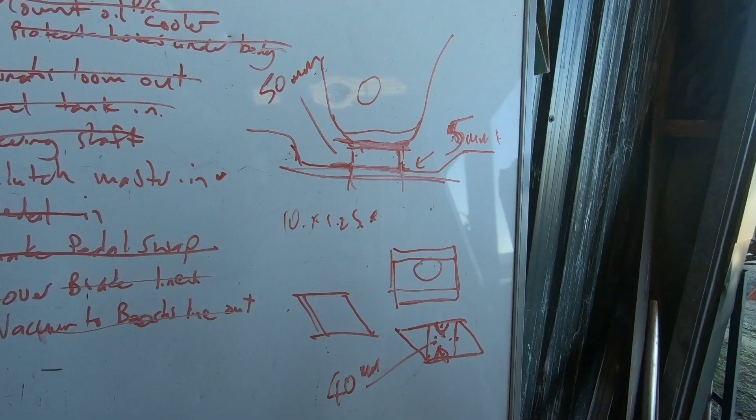A couple of days ago I drew some hieroglyphics on the whiteboard for Mike to follow, and he's done that and produced this little bracket. Of course it's not finished, it'll be strengthened up, but he's done an awesome job of following my instructions.

I got in yesterday and had a bit of a look over it, and we did some workouts with the radiator, trying to fit all that up, and he'd made some brackets for that.

I thought we could do with a few more mils of clearance for the fan, so I moved the engine back, started setting about giving the firewall a light tickle.

I set about moving that motor back a little bit. I shortened up the bolt that came through the firewall by a few more millimeters, and gave the firewall a little bit of a rub, very slight on the driver's side, and that moved the motor back maybe 3, maybe 4 millimeters. I know it doesn't sound like lots, but it's going to make a difference when we put that fan in.

Today Mike is going to cut that bracket to bits a little bit, and we're going to move everything, reroute it, and tack it in another spot. That bracket will be strengthened up on the bench later, but it's much easier to just mock it up for now. It's strong enough to hold the gearbox in place.

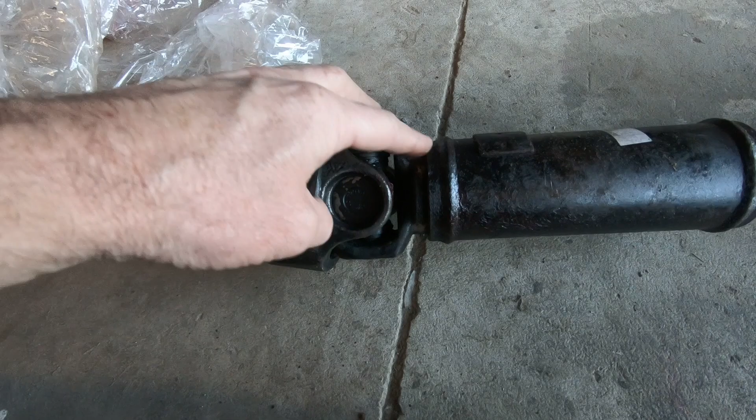So it was the last guy trying to fit it - he measured up drive shafts before he even had the motor properly fitted in place. Now that does give me a bit of a problem. The reason is we require paperwork to prove the drive shaft has been completed by a competent person, suitably qualified in the welding, balancing and manufacture of drive shafts. It's one of the things we have to outsource. But this one has already been done, and I don't have any paperwork. There's a bit of a problem.

In this situation, I've got two options. One, throw the shaft away and start again. Or two, hopefully this is going to work, is I will create the paperwork by taking this drive shaft to the drive shaft technician, who will check it, balance it, and say it's all good. Fingers crossed that he's willing to do that. If not, back to plan one, throw it away and start again, or we might be able to find a diesel one the right length.

For the back drive shaft, we put that in place, and it is looking really close. I'm thinking this is a factory diesel one. On the last one we did, we ended up moving the slip joint from here to there and throwing that double cardan away - it was having problems spinning that hanger bearing.

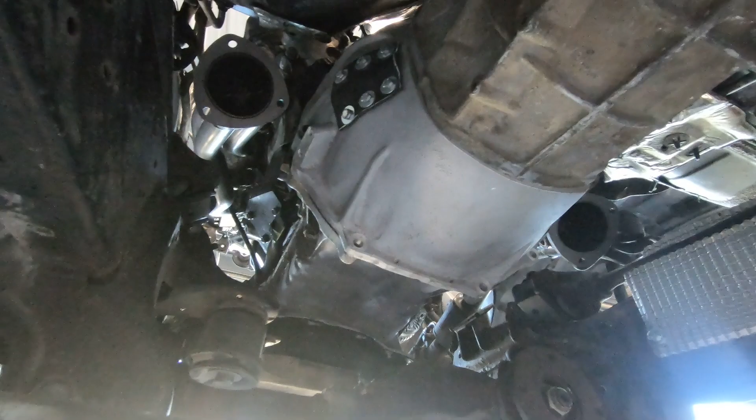What have we got to do in here, Mike? Just connect it and make it run, eh? Drive it out. Plug it in. Problem is I haven't done that. Haven't even wired it. Once it's mounted, we'll mount that dampener. And we're attempting not to put it underneath in this one. We're trying to keep it on top, like I did with the last one.

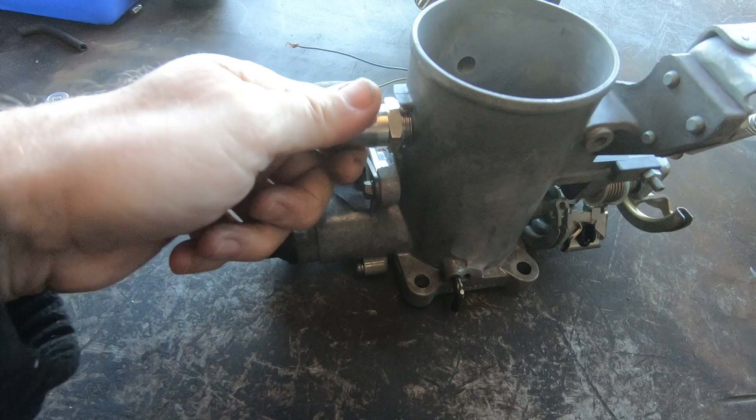Oh, and I've also modified the throttle body. This is the right one? That's the right one. We modified it to allow us better intake. And we found an airbox we're hoping to use as well. So that can be fitted up.

In the fan department, we were going to use a Maradyne fan, but the motor design gave us problems with clearance. So we've gone to this Zergo 16-inch fan, which is over 2000 CFM. So that's going to be mounted onto our radiator.

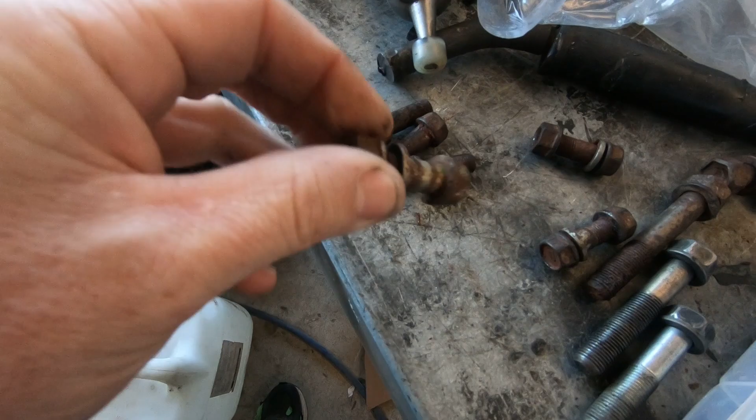Drive shaft bolts. Oh, what a pain in the backside that is. So on this vehicle, this is what the drive shaft bolts look like. And I can't even get these nuts off. Here's what the other ones look like. I don't think I can use those. So I scratched through my box. We have a box, I can't really see the writing, but drive shaft bolts and nuts. And I was able to find enough bolts. But I do need to get some more nuts because they're the special fine thread. So we'll find some of those and I'll be using the genuine ones.

Little stuff. There's a new fuel filter to fit. Because we've disturbed the fuel system and we're trying to make this thing as reliable as possible, just some little stuff it's important to think about. It all adds to the cost of the conversion.

So another busy day for us. I've got some wiring to do, Mike's got some engineering to do, and we'll do a couple of updates as we go through if we get a chance. Otherwise we'll do another update once we've got most of that work completed.

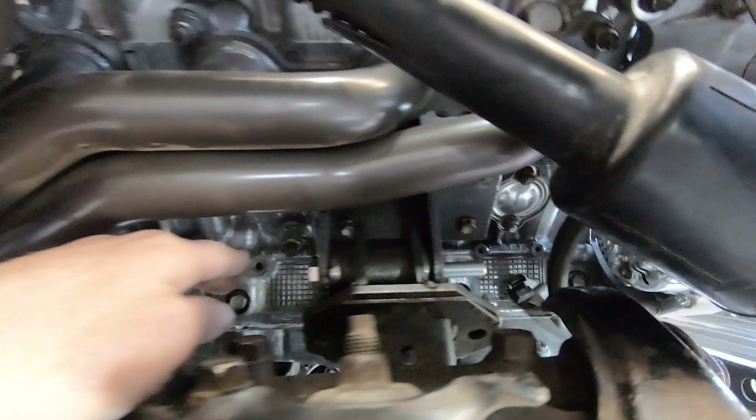So you've got that sitting in really nice. I decided to go behind those bolts instead of forward, I thought it looked a bit better. Otherwise, it would have had to come way forward. Yeah, it's a pain having to get in there anyway. But on this one, because we're that far back, you're better behind those bolts. That's what I thought. And it's going to be a bit of a nuisance getting the nuts done up.

The top one we'll get with a socket, and that one we'll just have to get with our stubby spanner. We'll do it up before we put the bottom mount in, if that's possible. We might be able just to lift the motor up, jack it up one side, slip it in. Normally, of course, the mounts would be on the vehicle when you put it in. So you just put it in.

And the great thing with these, too, is if you want to lift it, because it can pivot on that center point, you could put a spacer in here if you wanted to lift it. Yeah, and it'll just adjust.

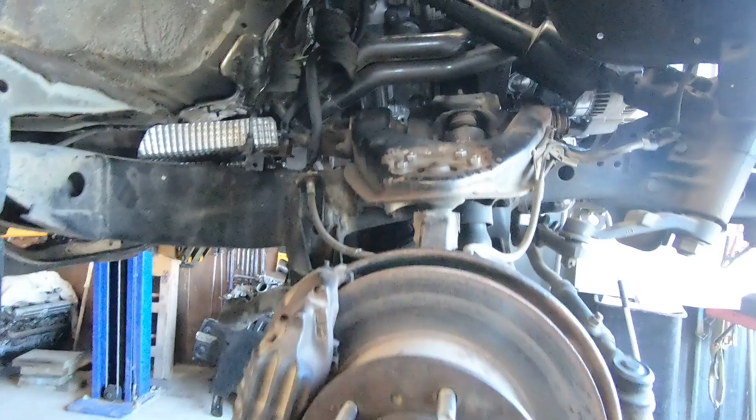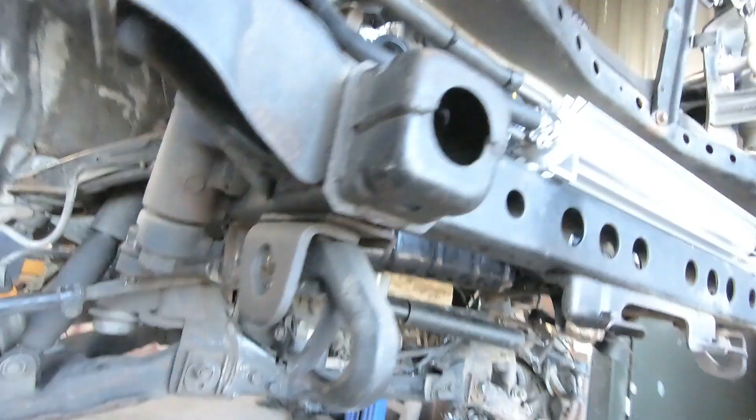And make sure you put the big washers each side of the through bolt. So on the through bolt, big washer there, and a big washer there, and then a spring washer, and then the nut. And it gives us lots of thread poking out, but the cert man wants at least 2 threads on every single bolt. We should get that. And because those ones are factory bolts, even though it doesn't have a spring washer, he can't complain because it's a factory bolt. Well, he can, but I'll explain kindly. That looks good.

The dipstick, while you're doing this, oh, that's going to be out of your way anyway. Motor sitting straight, we're fine. I'm happy.

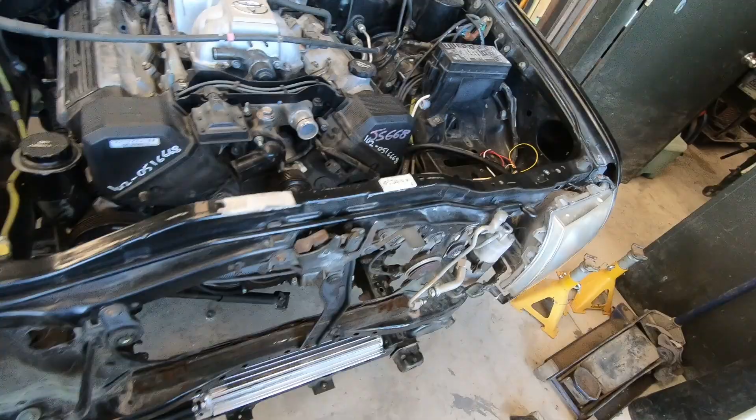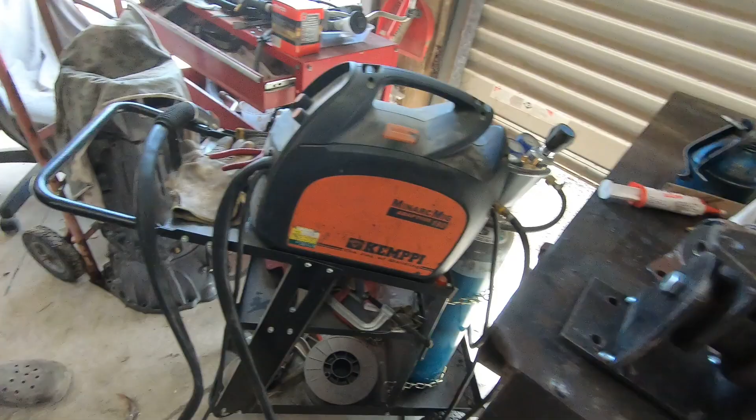They kind of match. Looks right. Okay. Mike has tacked up some mounts and they're looking bloody good. And he's going to put them in. You are putting them in. Yep.

I've actually got a bit of rust converter for this front panel too, eh? Yeah, I see that. If you can attack that, might as well deal to that at the same time. Well, it's looking very lovely in here. Position wise, it looks good.

I reckon you've got it about 0.5 of a millimetre closer to the left-hand side. I reckon at least those steel bushes in. You like those? Because you feel those. You like those solid mounty bits? Do you actually have to have rubber?

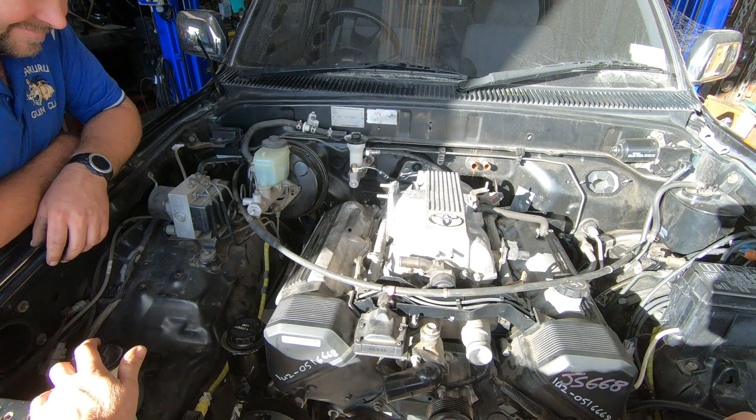I believe that the rules say you have to have rubber. Though, there was one that came down from up north, and the certifier made him take the rubber out and put steel in and made them solid. I'm like, that doesn't sound right to me.

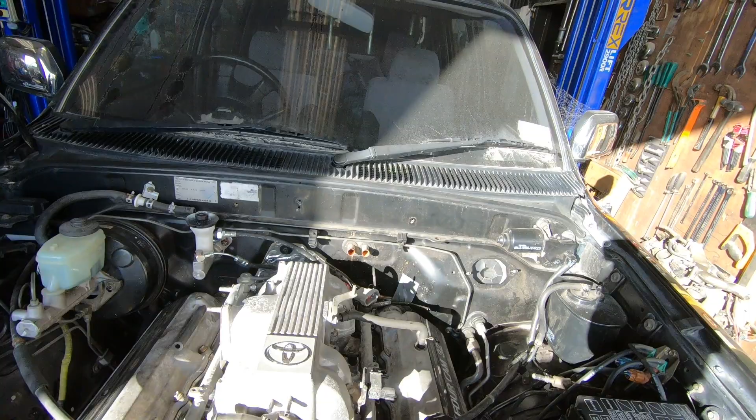I'm just going to have to give that a little bit of a tickle with the die grinder at the back there, just to give us a couple more millimetres there. But that's looking primo, man. You've done a lovely job. You like that solid mounting? Yeah, well, we'll put some rubbers in, that'll be better.

And I reckon we'll get that dipstick. They've done a nice job of clearing that there. I think we'll Z-hose that one, just a U-bend, and I think a factory one might even fit on that heater hose. Maybe. The one that you cut up.

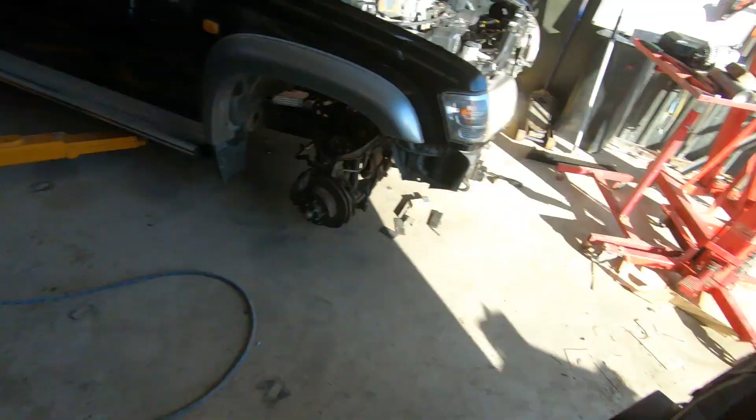Not really, eh? That looks shit. Yeah, I don't think that's going to quite do the job. No. It'll work if it was going on to that one. Yeah, do a crossover. So this one is way too short, is it? Man, they stick good. So that one's way too short.

Would that one kind of almost work on the wrong side? If it was a little bit longer, it would. So that design of hose actually pretty much would work. Okay, and the other one would kind of do the same thing. So I need two hoses that look like that.

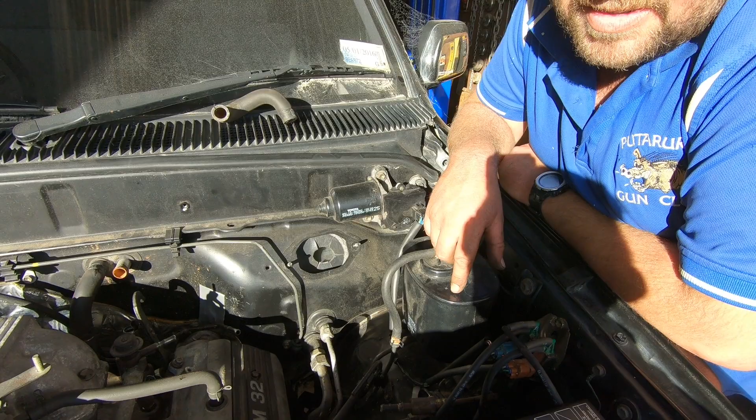Yeah, just a couple of milk elbows. Be perfect for that. A couple of what? Elbows, milk elbows. Yeah. We can get a Z hose. And they should do the job, I reckon. That would actually fit, just about.

Yeah, but we've got to remember, there has to be enough movement. We have rubber to allow for the movement, and of course, with your solid mounting, it ain't going to move. Yeah, but we're going to give it some rubber, and that'll give it like 3 mils more movement. Exactly. Still bugger all. Okay, so a couple of 16mm Z hoses is the go.

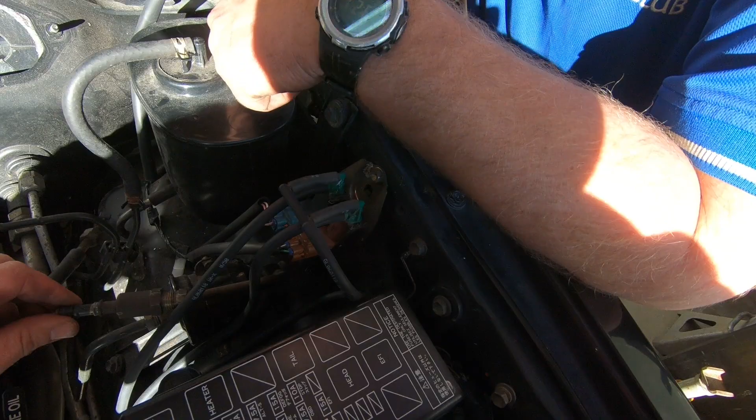Fuel return there. Do we put this one out of the fuel filter because it's got the proper bracket? Do we cut the bracket off and move it around here so it comes out on this angle and heads around with this one? Does it really matter? That's the fuel intake there, isn't it? Yep. Well, it kind of looks shit just coming across here.

You probably just bend the pipe. And then if we pull it, it's got a banjo fitting on the back, we turn it round, and it comes through here and joins with this one, and then they're running across the same spot. I kind of want them going more around by the firewall. Yeah, if we bend that round more and bring them round through here, we'll kink this one around and follow the firewall.

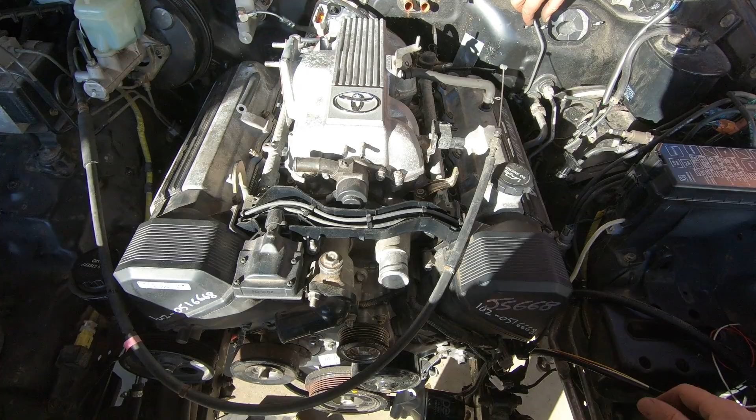I didn't look in the container for... That brake line could have stayed where it was. Yeah, because this being non-VVTi, it's slightly different across the head. It's got more pokey out here, less pokey out here. Mate, you did a nice job. Good clearance on the steering.

So with the wiring, I was going to flip these brackets around and bring it up high on the tappet cover. Instead of down on the side of the head, I'm going to bring it up a bit higher when I bring it round up to the airflow meter, and I'll keep that in the same.

You're still going to have the igniter things over here? Yeah, I'll put the igniters over in the same spot. Because the last one I put the power steer reservoir up here, but because this one is non-VVTi, we can put igniters here. We've got mounting holes. One of that's, so we'll have to put it in here, won't we?

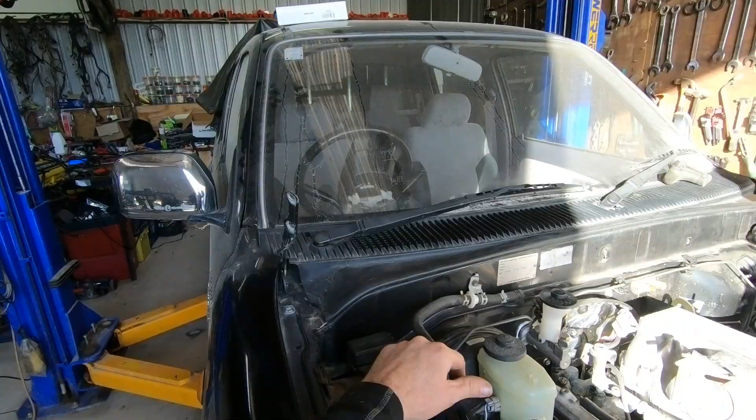Do we have the igniters somewhere for it? Yes, they're hanging off the loom, which is on the back wall there. Going to want to rebuild that as well. So I'll do that. I've got a couple others to do at the same time, so I'll fix that one. We've got like 2mm on the back there. It's probably enough.

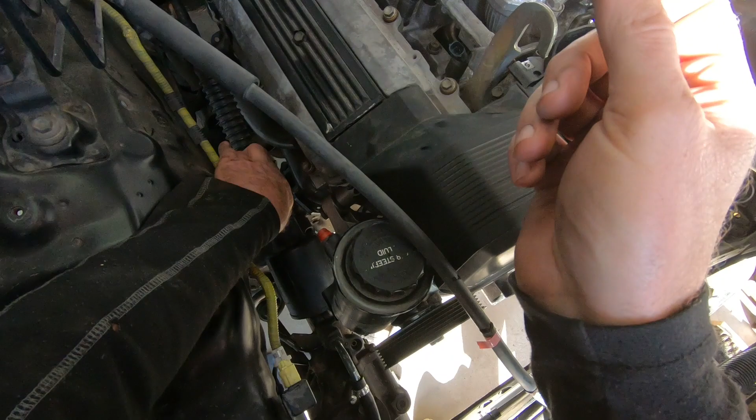How much clearance we got between the steering rack? A hand. So now you got it bolted on the mounts. You're going to tell me this drive shaft doesn't fit? Yeah. Considering we already put it on the other day. Looks pretty good, eh? Yep.

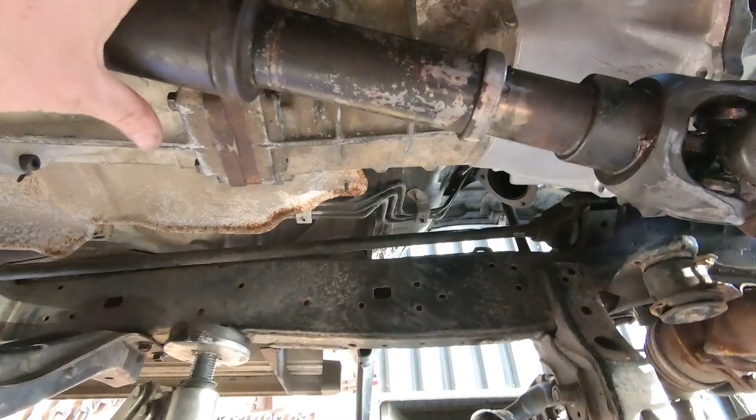I thought you were putting that... Oh, you were painting that bracket, eh? Sorry, I doubted you. Don't give me that high pitch. Oh, that looks good.

Well, the guy that started the job before us got that right. Yeah. I suppose. Providing our man will say that it's all good and it balances properly. We'll see. Penetration looks good, so we got good penetration in the slip joint. Well, I reckon an infinite number of monkeys banging on a keyboard, you'll eventually get Hamlet. Yeah. And it even looks like it might have had some new crosses put in it.

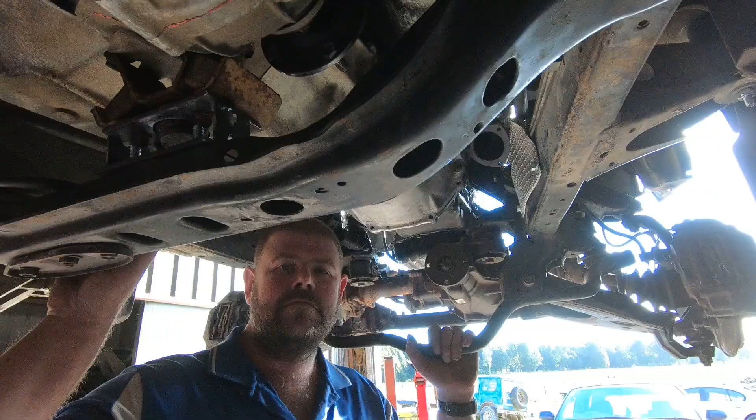Do you want a hand holding that back one, or are you going to use the lifter? I just don't want to do it in general. Do you want to go home? Yeah, I think I won't. We'll do it tomorrow then. Yeah, I don't know if that's strong enough. Doesn't move though. She'll be right.

Yeah, so on that. Oh yeah. Grind those wheel angles off. It's pretty much straight now, so just grind those flat. Plate. Yep. Simple. You're on a 50mm, so it captures right up. So right to the top, or you can actually go. That's 40mm. You could probably leave it like 2 mils off the top, and so as the weld goes along, it's angled nicely, and then we weld in through the hole. And at the bottom same deal, because it's going to be coming all the way down.

I don't know if the last one I left 5 mils out, so I put the plate in between or not. I don't think so. That's 40 mil plate and it's 50 mil all up. Yeah, so just put it a couple of mils off so you can put a nice weld along it. Yep. I've got to get that gearbox mount. You're going to buy a new one? Yes, I'm going today, so I'll take that with me. Oh, yeah. So drive shaft's in and straight.

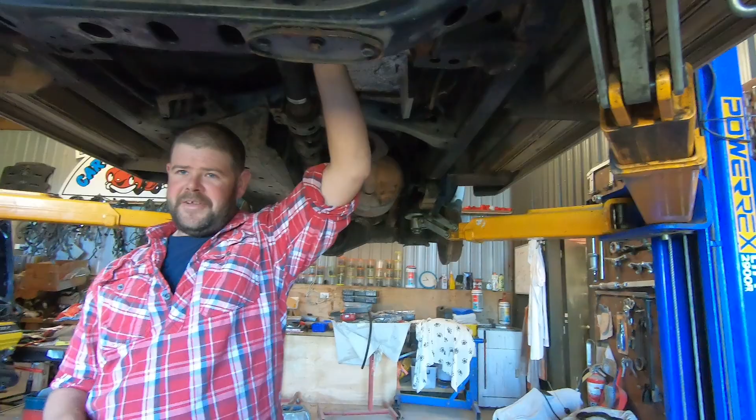So just balance? I'm thinking with the drive shaft, you whip down to the dirty old V6 Surf that's down there, the one that was turbocharged. I'd say the one with a Recaro interior, but they've both got Recaro interior. The 4-door with the Recaro interior. And take that interior out and put in my Surf? No. See if you can find some drive shafts in there. They should be the same length as these ones.

Make sure you mark them, and if we've got those ones, I can then take these ones today to the balancer, and we can get them balanced, because that'll take them a week. So why do we need those? We don't need the front one, but we need the back one to do our hoops, so we can start planning hoops.

So we can at least put, because what we'll do for hoop is we're going to put now. The rule is really dumb. Capture the whole chassis. You've got to capture the full width of the chassis. So do you need two? You need one here somewhere. So we need a drive shaft hoop on each join, there and there. So don't need one here. Don't need one there, even though that's probably the dangerous one, where it's likely to break.

If you're going to break somewhere, there's a slip joint, or any joint in here is less likely to break, you know. But so I generally try to aim back in here. Basically, it's designed, if the drive shaft breaks and falls down, you want to jab into that ground and push the back up. So we can at least build the front of the back. And so we'll probably end up pulling these brake lines out, or we go on the outside. The other one, we go on the outside here. We come all the way down, get some 6 mil, bend it into an angle, put a triangle in the middle of it. So I'll draw the picture.

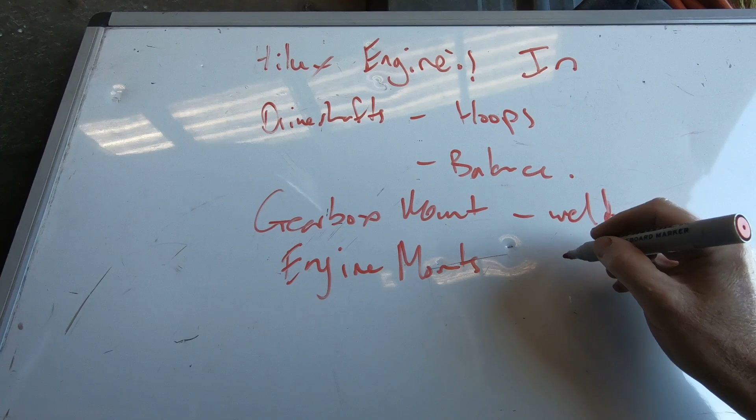So what are we actually doing here? Hilux. Undercarriage. Motor's in. Engine. Engine's in. So we've got to do drive shafts. So we go hoops and balance. Gearbox mount, yep. And weld. And we got engine mounts. Front. No hoop on the front. I've got to get for drive shaft. I've got to get nuts and washers, the proper ones. The factory ones are the best because they just work, and there's no problem with cert with them. They don't question the strength or anything.

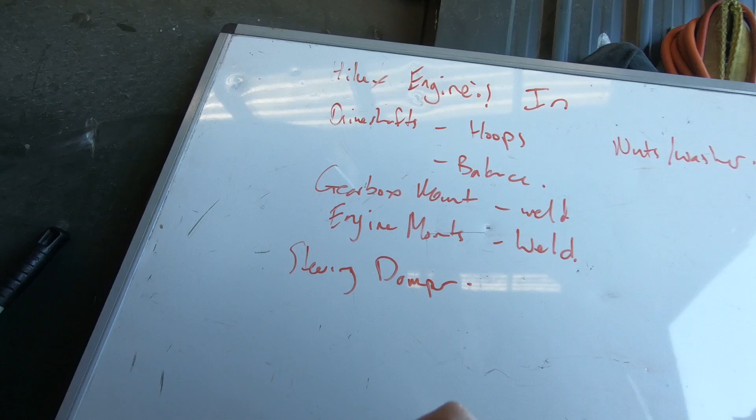Surprisingly, they wouldn't want one there because you think that'll be just as dangerous as the back. Oh look, we've got one. We've got a hoop. Look. Oh, we got a quarter sway bar safety hoop. That's all done, ready to bolt in the hoop on that one. Yep. I suppose, is that considered a drive shaft hoop? No, we just don't need one. I don't question the rules on that. I can say they're silly, but okay, we've got to do that steering dampener. Steering dampener. I reckon we pull the brakes. Check over the brakes. We'll do some diff oils, and diffs. But don't oil a box until it's been out again.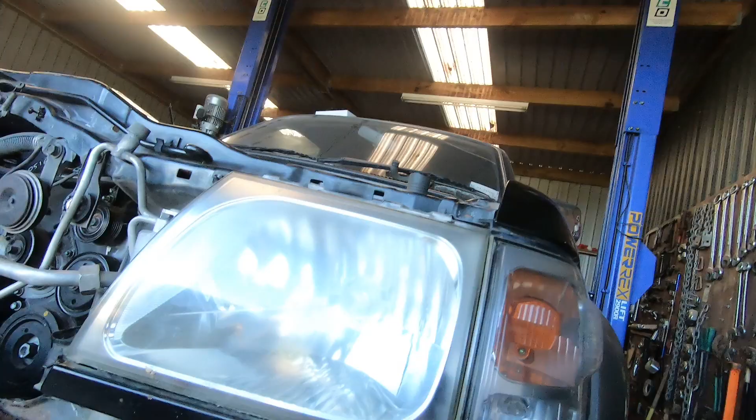Power steer lines. And then hoses. Oh, I ordered a Z hose and then I found one in the back room. So you could probably do the... Yeah, one's... If you bring it down, we'll have a look at it. Inner guards. So for the inner guards, there's templates. Yep. Make sure you do the 03, not the 09. Oh, they should be labelled. Oh, fuel lines, of course. And filter. Airbox.

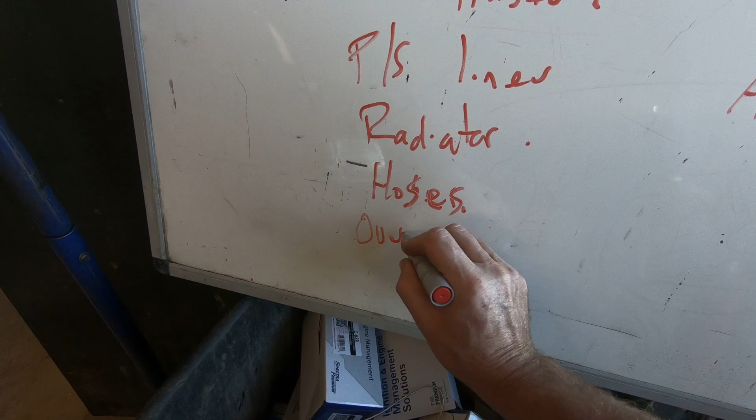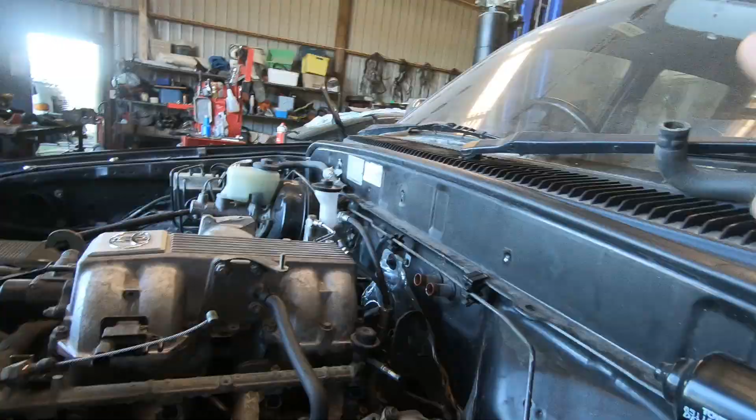Oh, have you fitted the radiator? Have you done the overflow too? No. Just double check that fits, and the washer bottle. Washer bottle, yeah. So that fits clear as fine, doesn't it? Fits. That's factory, so we don't actually need to do that. Not like the overflow sits here, so that should be perfectly fine. Just maybe an adjustment of the hose. I've got to find a pump for the AC. And do lines. I'll wait till those mounts are welded. I reckon it's just about enough, eh? Because that would easily do that one, and then that would easily do that one. I did a measure, and I was within a few mils. That'll bend nicely. Yeah.

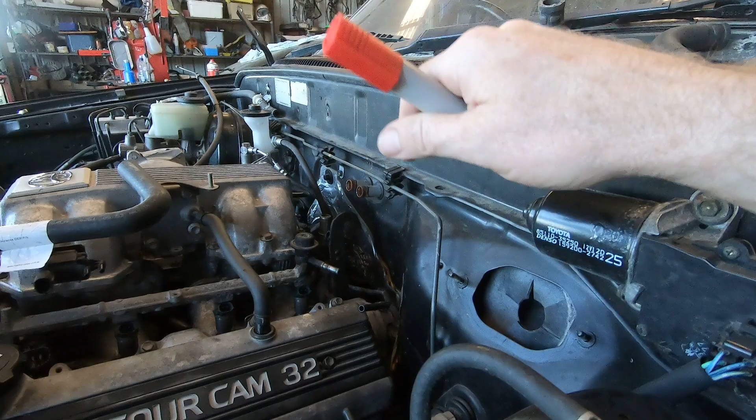So I reckon if you're really careful... I've got 2 more coming, because they're quite nice for these jobs. Just when you slide them on, a little bit of lube so I can take them off again. Don't hose clamp them, so it's obvious that they're not clamped, because I will need them out of the way when I do the wiring. Oh, wiring. And then an exhaust. Bumper. We got those brakes. I put brakes on here, eh? And a bleed, because you've taken all the fluid out of them. I don't have a battery for it. There wasn't one. They can wait another week or so. I'll just get him a new one. Yep. No stuff around. Just get a new one. And that clamp should fit fine. Yes, well, we've got the clamp.

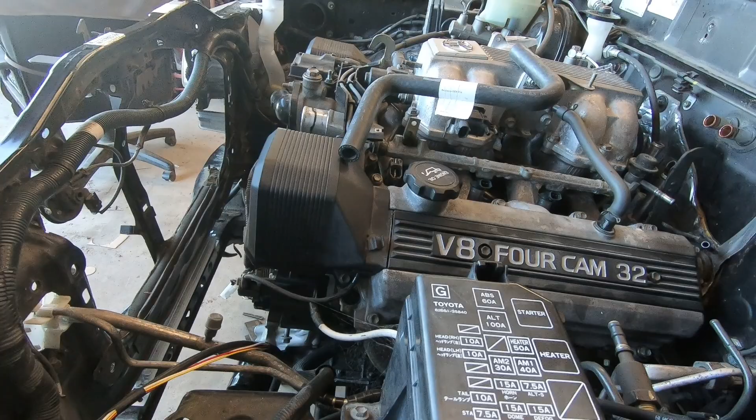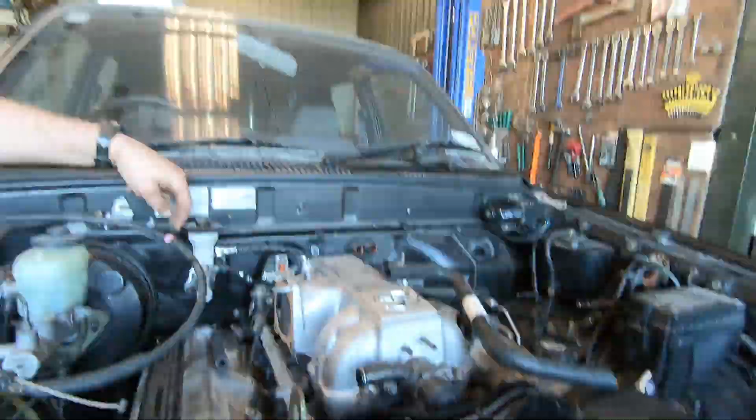Throttle cable. So I've modified the throttle body. Same as mine, bolts on there, is it? Yeah. It'll fit nicely. Do you need a thing for that to sit on? Ideally, we'd put a plate in there, rubber plate. Plastic plate. Throttle cable. Yeah, we'll use the diesel one. Drive by wire. So this model, the diesel didn't have a throttle cable. Oh, brake. We've got a new bit of line. So it's from there, and it just comes down to here. Oh, yeah. That's easy. Vacuum booster line.

Intake manifolds down there. Intake manifolds on and buttoned down. Aircon. I've got aircon, and you've got the aircon radiator to go in. I ran out of the bearings for the late ones. So I've got another one over there to do as well, so I'll do this one as well. It'll be shagged given everything else that was on this, and the dirt and how long it's been sitting.

Well, how about we set the throttle body on? Now I've modified it. And we get it measured. Duct tape on there, it's going to be right. Yeah, just leave the tape. I just leave the gasket on too. Just slide it on. It's been on before.

The breather from there comes around to here, and I've taken the bit of steel line that normally goes around there off. So that's to stay blocked off. Yeah. And just go to there now. Yeah. I wonder if I just drop a bit of hose down underneath the manifold and pop it out this side and onto here, so you don't have it coming around the front. Keeps it a bit cleaner, eh? There's some nuts on it. That's going to be mint, man.

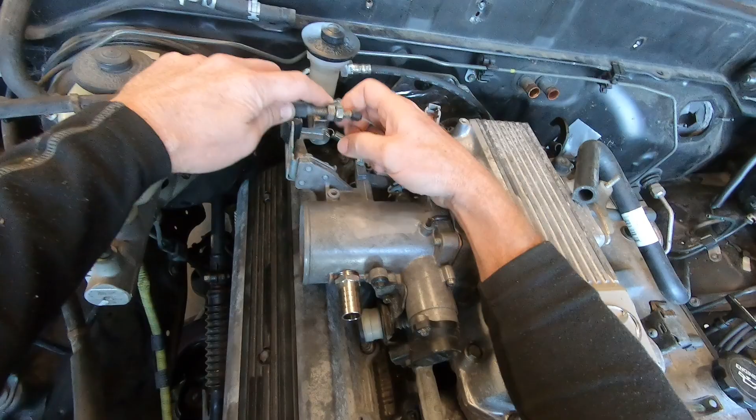These generally aren't quite long enough for a Hilux. If you want to screw that back for a start, we're going to have to. I'll go see if I've got another shorter throttle cable. Why don't we turn the plenum around and make up a bodgy-ass looking wheel, spring, and then paint it black? No, let's not. And then just give that a tweak out. Yeah, give that a little bit of a bend tweak out, and then that keeps that the same.

Yep. And we'll bring the fuel line sort of in this. Bring that in and quite low, I think, down here, just above the aircon. You just about bend it around so it goes on the inside of this. Yeah, something like that, and head around to there, and we'll give that a bit of a tweak, and it'll kind of line up.

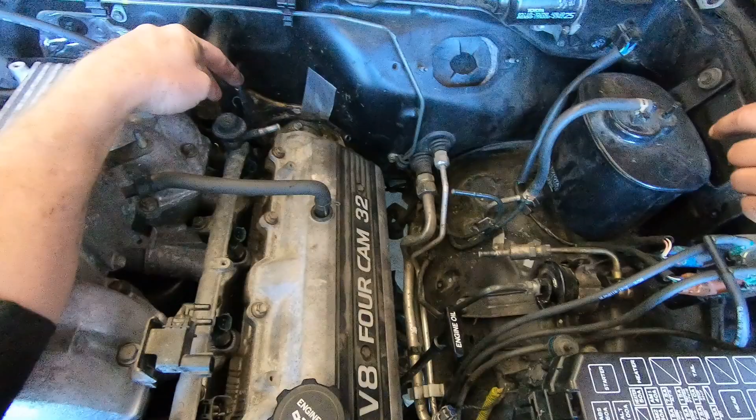Those heater hoses look lovely, man. Yeah. That universal hose worked perfectly, eh? It's just a shame that one's got that slight twist, but by cutting a bit more off this, you could, but yeah. You hardly notice it. There's no restriction there. This one here, once we've got it all in place, we'll bend it out. It's just bent in from when we were lifting it. So throttle, washer bottle, the overflow bottle fits.

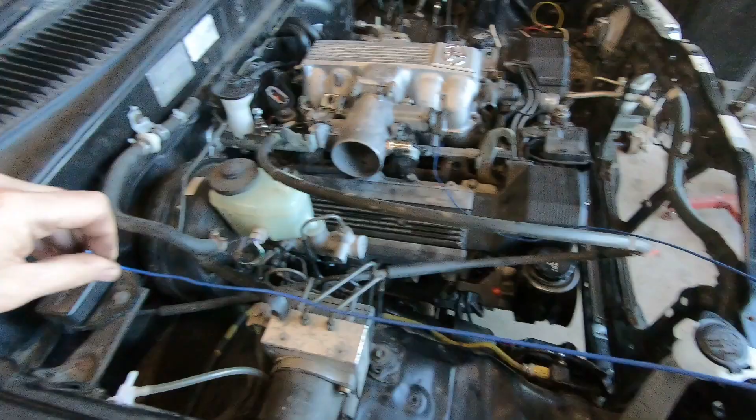So if I get this throttle cable, and we do an overall length, these are fairly natural, work out a length. So I've got a bit of wire, so if I come out like this, and we have a little bit of a bend like that, just a flowing bend, so it's not too sharp. I think it's not too bad like that though, is it?

Yeah, but by the time you put a bend in that cable on your end. Yeah, I know, that's what I'm just looking at now. Whereas by going under there, you would. If I do that, that shouldn't be too bad. I think we can get a reasonable flow by that. Won't be too bad. Okay, can you give me a white pen? I'll just mark that there like that actually. Right, it's just past that joint. Just past here. That's the length there.

So it's this side. So this is an X. We don't want that bit. Okay. That pen's leaking everywhere. And then, so that's sitting in place. If I put this in, there's not much adjustment on this one. So basically I need to go between, so from there, and it's going to be sitting inside. So I put that there.

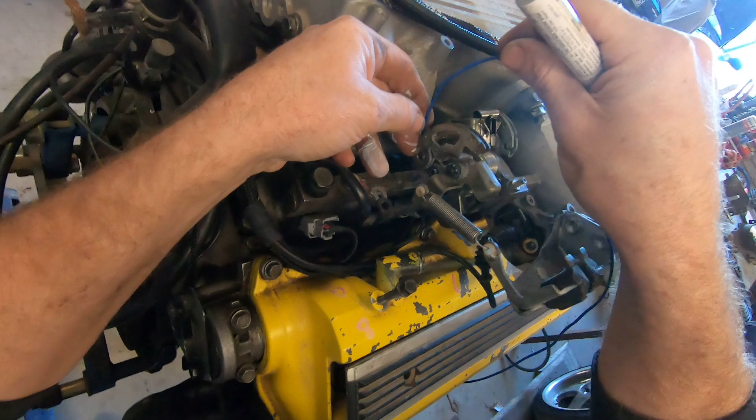And then if I get a throttle body, covered in white pen, and I measure the length of that cable unit, so from here on a reasonably natural pivot, that's like 65 millimeters. So at the moment it's 40 and it needs to be 65, so it needs to be 25 millimeters longer in the inner cable.

Another inch. I'd love another inch. No, I'm quite happy without it actually. You'd be stoked if you doubled in size. Whoop, whoop.

So these hoses, they just put a bend on it? You don't need to actually use a bend or anything? Depends if it's going to kink. Well, hopefully that one's just going to pull out nicely. This one I'll just give it a go.

Generally, if you just hold them right and hold your hands right, they'll pull out. That one there, if I put something over that, hopefully that should be right because it's held here. Yeah, I'll try that.

That's nice, that's looking like it, eh? So I'm going to that one, eh? For the return. Yep.

So you're happy with the straight pipe there? Yeah, I'll have a little bit of a kink just to allow for it. I'll just bring it around a little bit more, because I can go around and set it up nicely, just around like this.

You want a tiny bit more on with all those - the reason they have a bend in them is to allow for the movement better. Yeah, and so that's the same as that. That looks good, that'll be sweet, that'll go a nice curve.

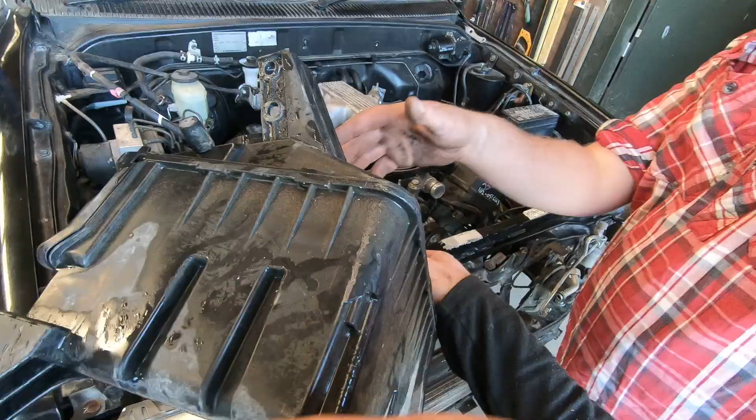And I've got to find that rubber seal for the airflow meter, and that one should fit straight into that. Yep, so that's not going to foul on the bonnet.

Or do we put that down there like that? Now, if we put it like that, okay, and then so that bit's correct, so that bolt's correct. Hold it up - can we give it a beating? Can we give it some relief?

Here, it's just this bulge here - is that for the washer or something? There's some bracket, there's a little bit of a bulge just there for that washer. I think it's just that bulge there that's holding it, and then it would fit.

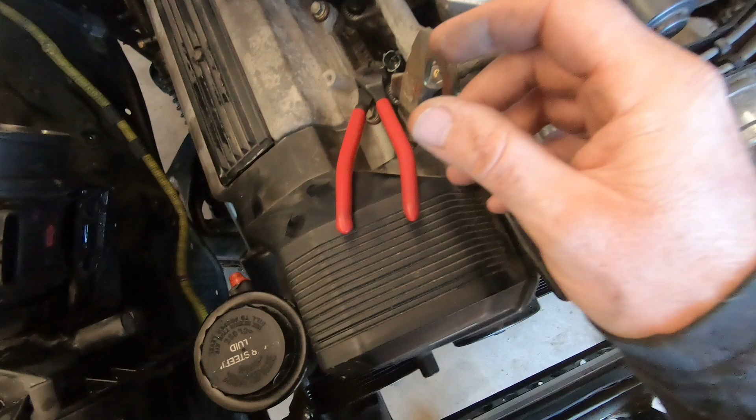Where's that airflow meter that I did? What did I do with it? It's on the bench underneath the water. Got it, so it goes that way. Those bolts line up - yeah mate, they're going to bolt in.

Unfortunately I don't have it, but the other two had a bracket coming out - it actually had a bracket coming down to the body. I don't have them, and there's actually no bolts on this side of the unit. Okay, so we'll have to endeavour to put some bolts on this side of it.

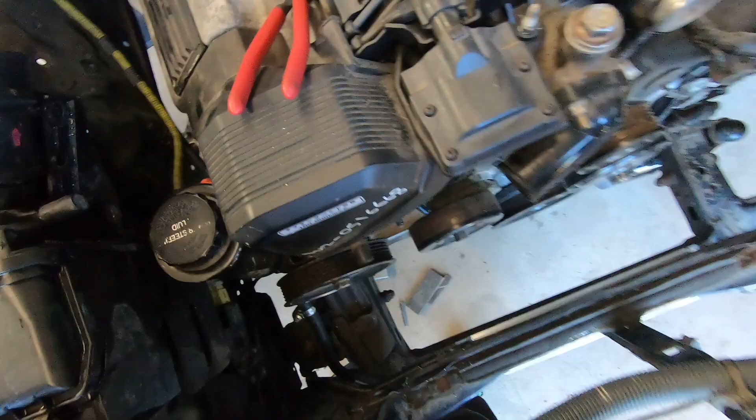We'll get some little spacers and push them in. Yep, but look at that - that was meant to be. It is sitting up a little bit higher. I think the plane upwards is a little bit more than I wanted.

We'd like to get a 45, so we can have a 90. There's a 90, or there's a 45 - a 45 brings it off. But I don't think they do a long 45, they do a long 90.

Okay, we'll come up with a plan there. I'll see what I can find, eh?

The reason these nip up is when it's been done up really tight, it's swollen this up. So very carefully on the linisher or on the grinder, just whip the end off. Just taper it down a little bit, and that should help it screw in nicely. And use lube.

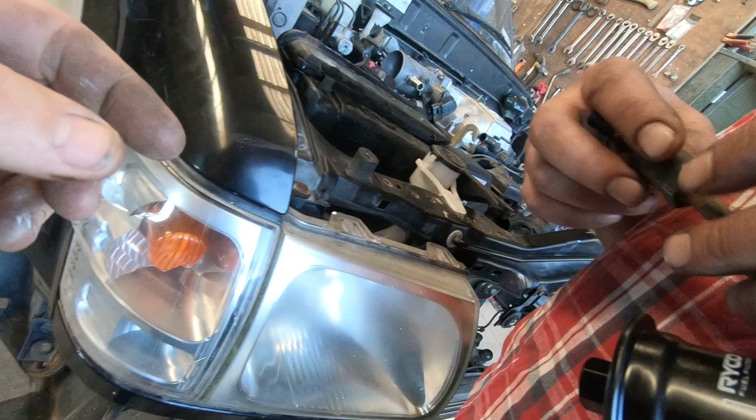As with pretty normal with these conversions, nothing ever quite goes to plan, but it's actually pretty good to have a plan to work with, even if it does change. The end goal is make the motor run, so as long as you keep focusing towards that, you should get there. There's the motor, so that's looking pretty good, we're happy with that, and Mike's done some fuel lines over the back there. We'll look at possibly getting the main pressure line crimped and put up the new fuel filter. So that's pretty happy with that stuff.

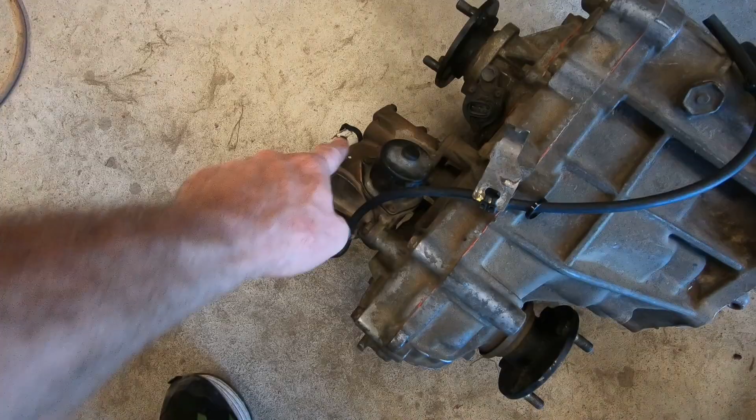We've actually had a problem with the gearbox. I chose to have it rebuilt by someone else, and it doesn't quite work like we wanted. So that's dropped out again. It was pretty simple - transfer case is out, and I might go through that transfer motor while we're at it. It'll allow me to get the drive shafts away to get balanced and checked. We'll strengthen the gearbox mount, so there's the template for that. Bell housing had to come off again, and I'm going to get a new gearbox mount as well.

Seeing we've gone that far, we might even just pull the motor out again. The mounts are done, but we need to weld them up. So it might actually be quicker for us to work the motor out again and weld up the mounts on the bench. I can just give that firewall a little tidy up. I've got it packed well back in there - just want to make sure there is a little bit of clearance.

And if I was really fast, I might be able to get a wiring loom done. Chances are I won't, because I've got a few other things to do. We're going to have a week.

Oh, and steering - this one sits a little bit different to the last one with the VVTi. And the drag link, or the dampener, is clashing a little bit. So we'll be looking into that next week. Right now, we're going to have a weekend. Well, I'm going to go collect some parts. And we'll talk to you once we've got a bit more progress happening.

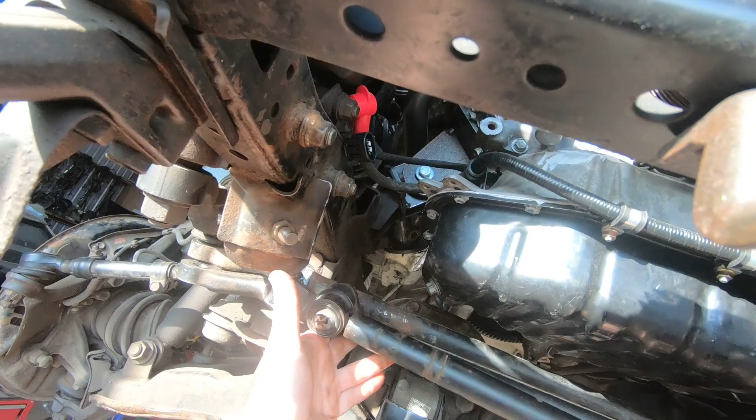So we've taken off the V6 drag link, and just to make our life fun, on the V6 one the dampener sits on a bit of an angle, and it was just coming up close to our sump plug. The diesel one sits straight, so it's given us a new little issue.

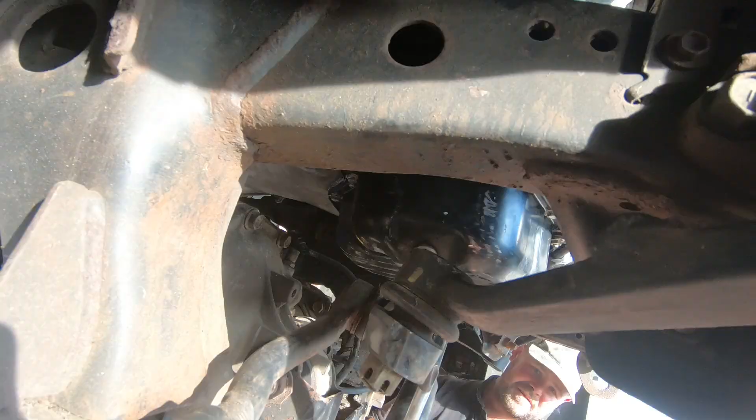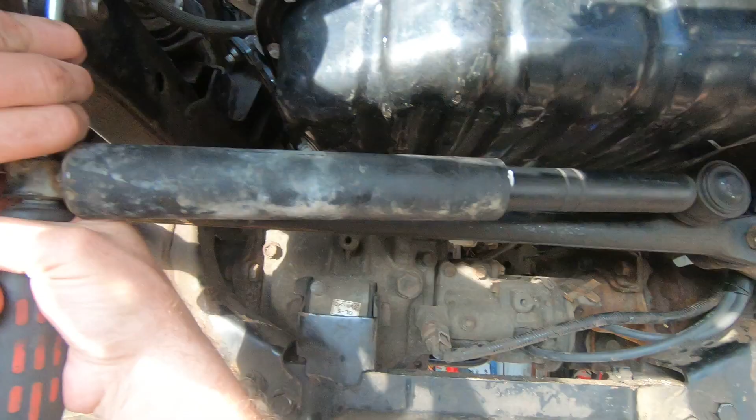What else is going to be in our way? Radiator should be alright, everything should be fine. That's the spot then, eh? Well, down here's not going to work unless we get an aftermarket kit for that. It goes through the range nicely there. It's going to be really hard to make that neat and tidy. Sure is. Yep, you never think about it anyway.

Let's get the motor out. Seeing our gearbox is out anyway, let's pull the motor out again, even though we weren't planning to. Let's get it out, get those engine mounts welded up. I'll give that firewall a tickle. Have to be gentle, one's already broken.

Do you want to get your welder in there again? Well, it's just the tack's coming, just one corner of it. So you can give it a tickle up. I'll give that firewall a tickle up.

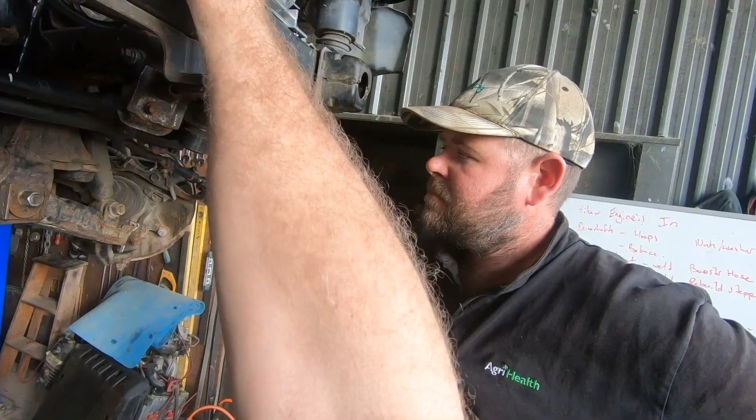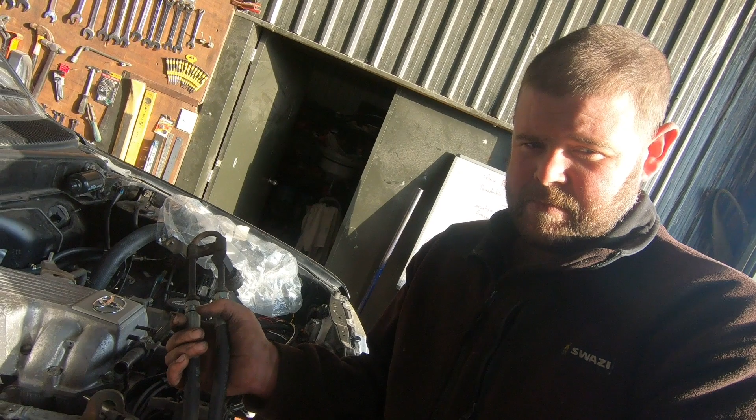Oh, power steering - slip a power steer pump on, get those power steer lines, get the box out by the bulldozer, and then up in the storeroom there's a box of different parts, and we'll work out some power steering. So we can get that all crimped together while we've got the motor out. Yeah, good, I'll do it. So, well, I want a power steer pump to work. Oh, okay, this particular one is actually for my own Surf, that two-door down there. So that's the setup for that. These are, we've made them a standard length.

We try to make those both the same length if we can. These two are a little bit different - you failed on that one, actually. This was one of the first ones we did. How hard is it to get two pieces of hose the same length? We're trying to make them a standardised unit, so then one hose does both of them. But that's the concept we've got.

We're not going to have the idle up, we don't need the idle up on this one. Don't worry about that, that other one's an auto. So I'm going to run the idle up. I don't even know if we've got these fittings for this, so we might have to find some because there were none in it.

Oh, you've got a banjo with a bolt on it too. You're doing well, they're everywhere. That's why I don't throw anything out. Don't throw anything out, ever.

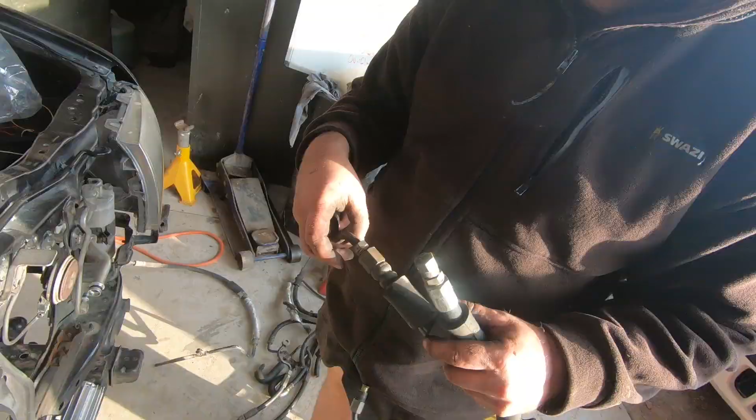So I kind of think the idea is you want some rubber to allow for the fact that the engine's going to... It doesn't need to be big or anything. I bring it up here to give it enough room. And remember, we've got that air box in here too. The steel right angle makes it quite easy to work with.

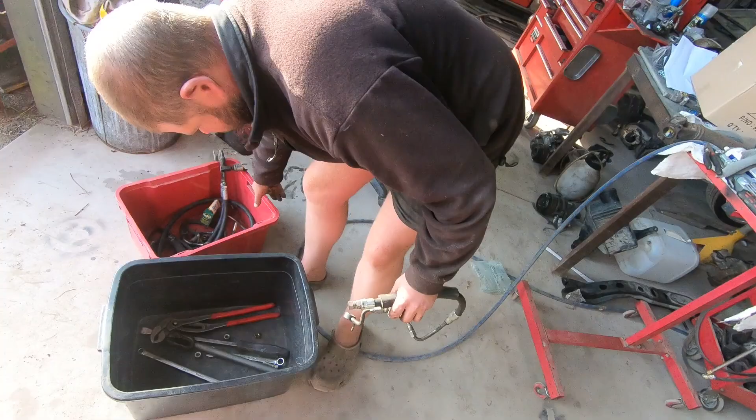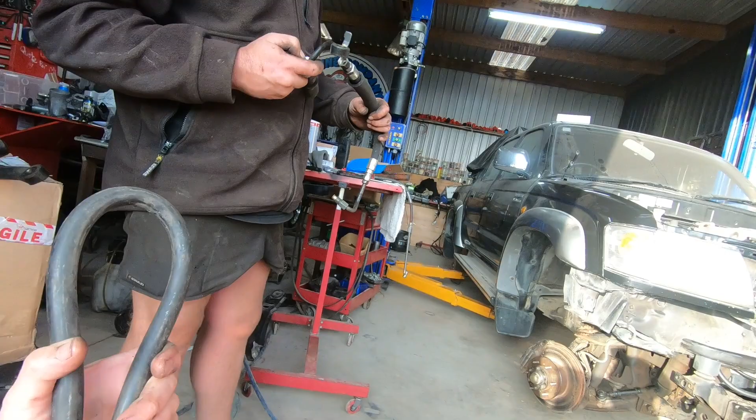I did have some spare ones of these hoses for a while. Oh, so there's another one. Yeah, it's a bit long though. But I've got both fittings here, I could make that work. And it's got an idle up on it. So that's your basic with no thingamajig. But I don't know about stressing it, just not having a bend in it, having that bend quite sharp.

I think this design looks better and gives you a place to mount it. There's nothing better than having a place to mount it. Yeah, well, you like a bit of mounting, don't you?

Bloody heap of traffic here today. It's busy as.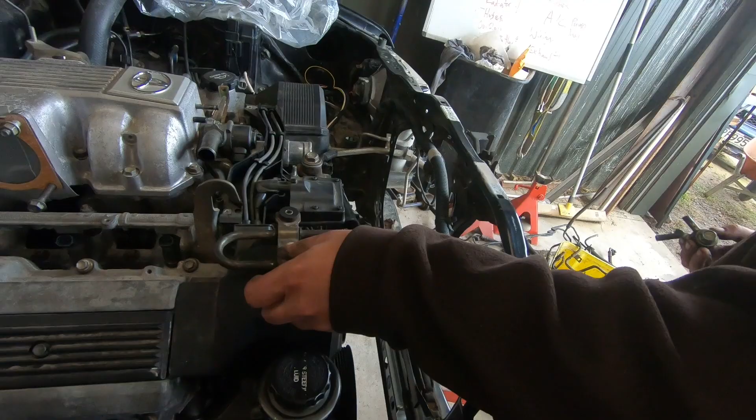Stresses me out. There's a motor. Oh, I did it again, eh? It's an engine. What? There's an engine. Motor. Engine. Engine.

Have you got a little brackety thing? Have you designed where that's bolting on? Yeah, up there. Which hole? Up there, about there somewhere. Well, you need to make sure the bracket is actually going to bolt on before we take it over.

Because otherwise we need to weld brackets on. So you need to put a bracket through here so it can weld there.

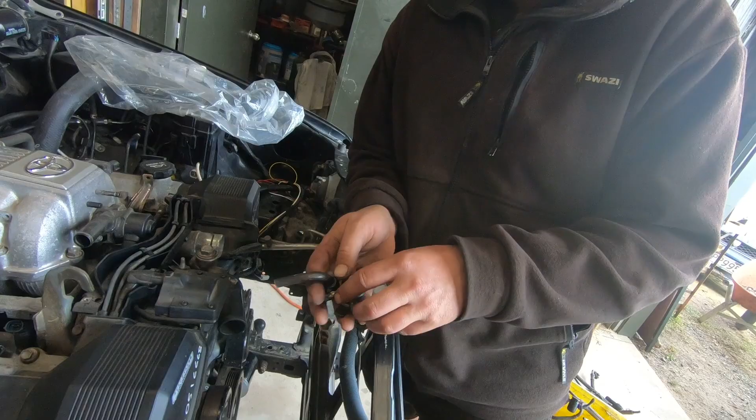Right, yep, next one. Is that right? The right fitting? Yeah, so this can be trimmed right off. Nip it off properly.

It'd be easier if I could actually screw this in here. Screw it in.

That's a narrow one. So no, that one's going to need the banjo bolt cut down because you see it's... So that's actually one off the hydraulic fan. Yeah, but you can still use them just fine because it's just a banjo bolt, just cut the bolt down a bit shorter. So, but this, what angle are you going to put this on?

I'll get a fitting ready for it so we can actually bolt that on tight.

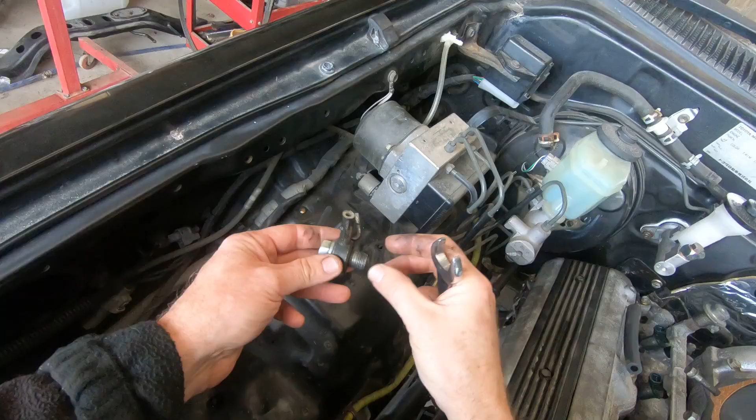Make sure the bolt - remember we're going to put a couple of washers on there, but if it bottoms out in the bottom of the pump, it won't do up tight.

So that's not a thick one? No, it's still the same. Yeah, same.

There are shorter banjo bolts too. There's lots of thin ones because that's the hydraulic fan pump. Yeah, and different models - here's a short bolt, it's fine. A bit more of a bend on an upwards angle.

How about we just do it with a bit of wire? Garden hose. A garden hose. Never thought of that. I did. I thought of it myself. By yourself, you thought of garden hose?

Garden hose. You really want to do it with garden hose? Well, then you can get your nice angles and things to make it look pretty. Yep, I want it to look pretty.

No, we're going to the top one, because I don't want it crossing over. It'll look funny if it crosses over.

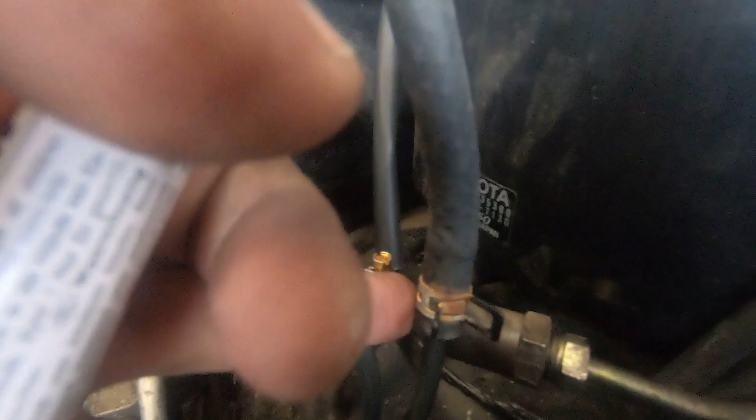So we've measured up power steer lines, and Mike thought we'll do it in garden hose. It's actually looking pretty good in garden hose, to tell you the truth. So that'll come up and be sized up. We'll run oil cooler lines up here with this and into that reservoir. And we'll hopefully be able to get some crimps done onto our main feed instead of having the hose clamps and make it look a little bit more standard. We've been playing with steering dampener, and we'll come up with a plan for that while it's out.

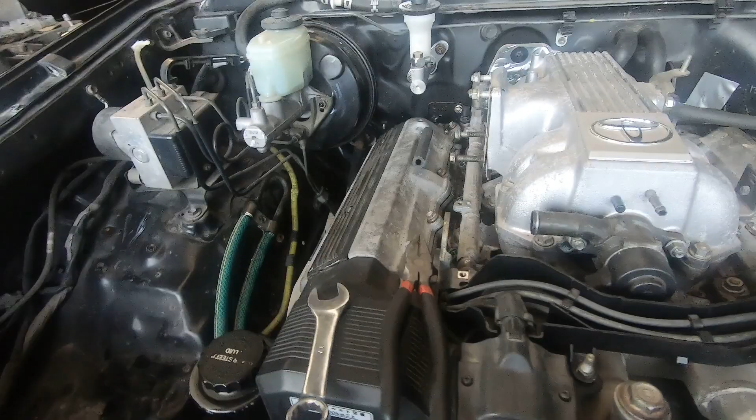So Mike's going to have a bit of a tidy up, and then we're going to pull that motor out again, even though it wasn't quite the plan. The plan with this one was to prep the motor, put it in the hole, leave it there. But unfortunately, because the gearbox had issues, I had it outsourced, didn't work, no big drama. That's conversions at the end of the day. We have got that out. So the easiest way for us is just to hook the motor out again. We will weld up the engine mounts, do a couple of other bits and pieces, and put it back in. It's pretty much just sitting here at the moment.

I can't do radiator hoses because the motor's not on the right angle. The radiator's getting some welding done at the moment. So there's a few things that we just can't do, but we keep moving along in the process. We can do power steer lines because they're flexible. Can sort that fuel line. And I can get some wiring done if I had the time to do it. I've got a whole lot of other things to do as well. That'll keep Mike busy for the day. And we'll give you a bit more of an update as we progress along.

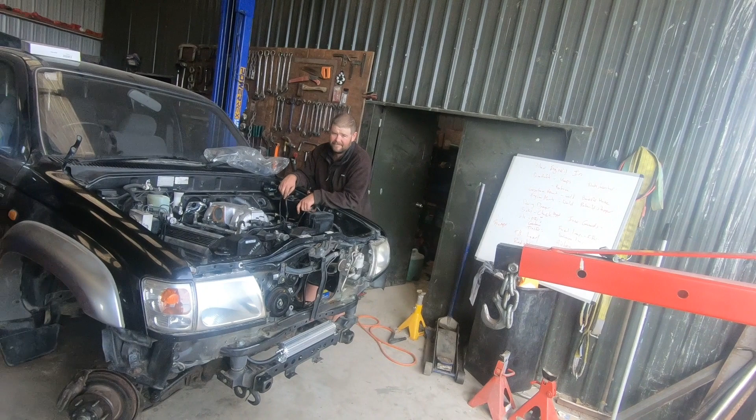I like them tight. When I'm trying to get them off, I like them loose. Have you tried some lube? Lube often helps them get off easier. How am I going to get lube in there? Try the other end, because the other end's smaller. I'm telling you, there's such a thing as a happy battery. Well, not really. I've never seen a battery running around going, oh, look at him, happy days. We'll have to see about this. And we'll have a little tester when it gets 100%. Does that make it a happy battery? No smiley face. Is that all the difference? Yeah. So it needs a smiley face and 100% to be a happy battery. Right. Cool. Good enough yet? Struggle when someone's watching. See, that was easy, eh? That's why I'm on the big bucks. Because I know the other end's easier to get off. You've been trying the wrong end all the time. Maybe. Still get the same result.

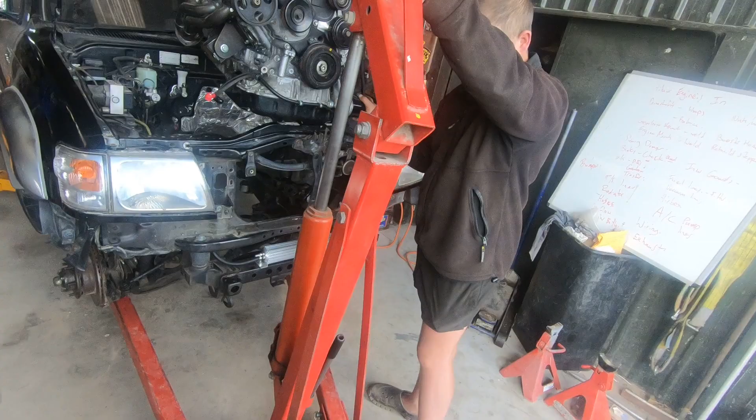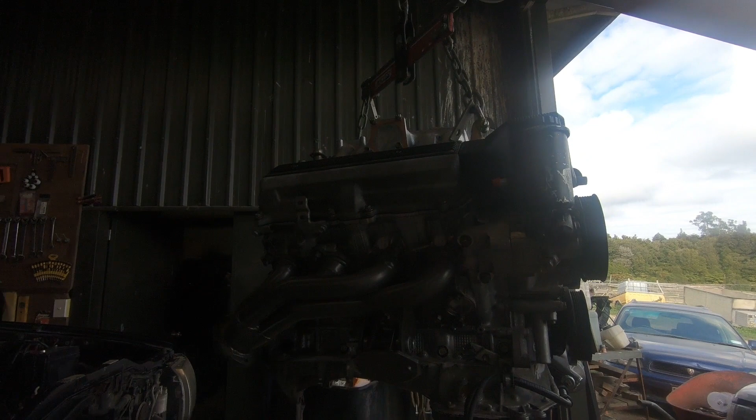What do you need me for? Pull it out. Out again. Was it really in? Yeah, I think it was on. Righto. Get those mounts off, get them welded up. I think we're going to end up pulling this around 10 mils, so it's just about on that. Or we can, depending where the throttle body is, because the throttle body's about here. There might be a little bit of bend in it anyway.

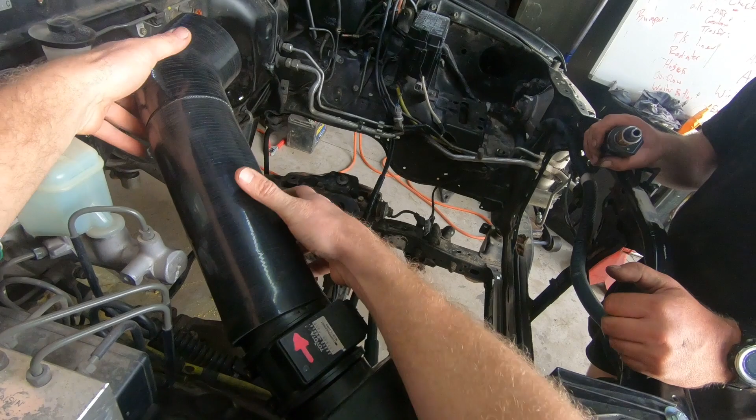Well, we cut it on an angle. Yeah, that's it, there might be that slight bit of bend. You're allowed a hose clamp on that bit. I'll let you put a hose clamp on this end. You don't even need much of an angle. Yeah, that's right. It's just to make it work. And to move this one over, you'll lose that one. It's already pulled over as it is. Yeah, so hopefully we can get it on an angle cut. Throttle body's about there?

You're not hose clamping there. I do it just for fun. So I found it's 83mm straight and an 83mm 45 degree, and that should provide enough movement. I mean, there's bugger all movement in the engine mounts anyway. Yeah. It's not bad.

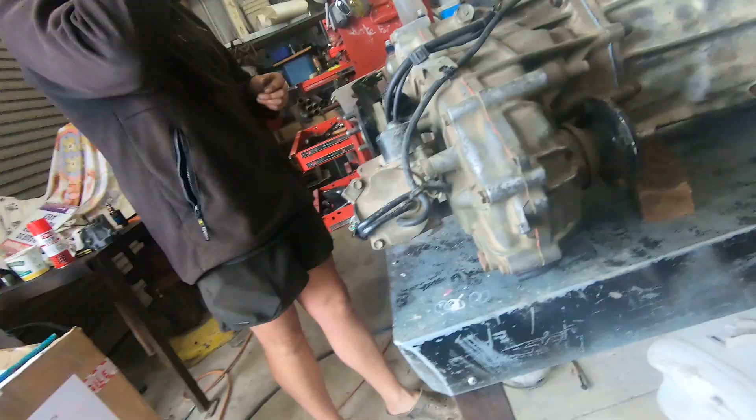Well, that's got to be the easiest way I've ever seen to do them. That's awesome. And even slicing, I had to trim the other one. No worries, eh? You'd think it would fold it over. I've got a little box of those, so if we ever need little bits of rubber, there's a whole box of them at the back. That's the easiest way I've ever seen. You can't get much cleaner cut. No, no.